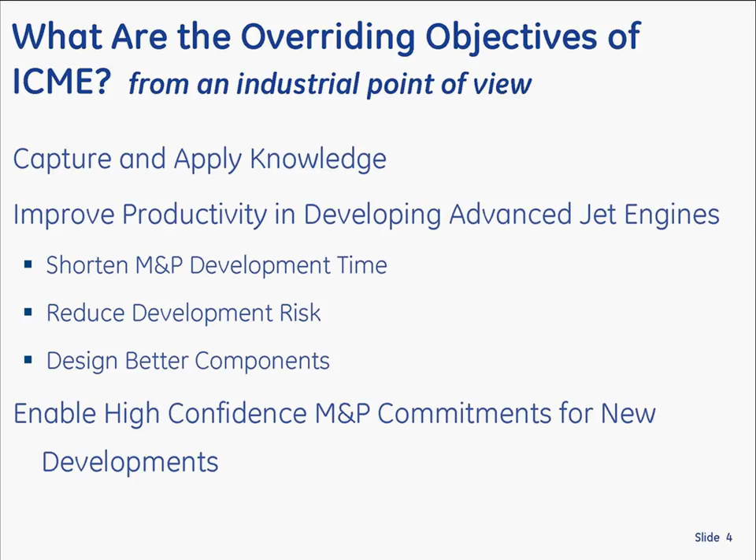Okay, so here's a slide I leveraged from Deb Whitus, sitting in the audience there, and we did this as part of the DARPA AIM program, when we were thinking about what is our end goal. Well, we want to be more like the people in the design world, where we can do analyses in hours to weeks, instead of weeks to months and actually to years, which is what it takes us in some cases.

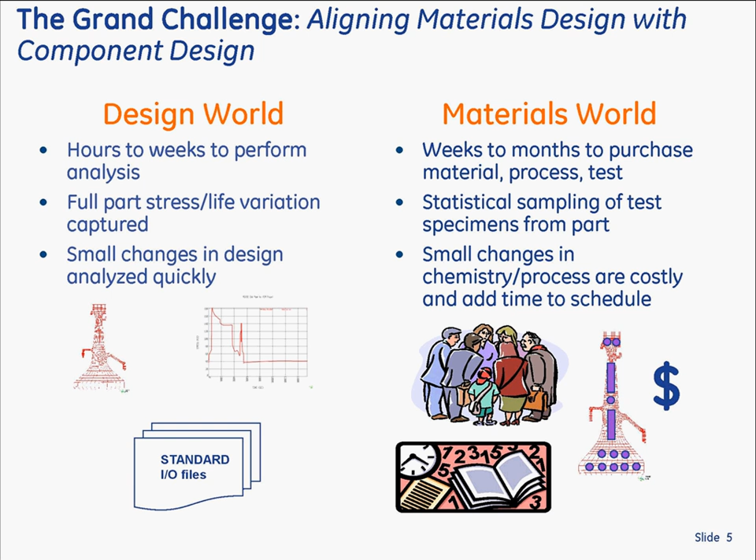So the fact is we didn't have the tools to do that effectively. Now we could take educated guesses, but at the end of the day, our chief engineers and the aviation authorities, they don't want our guesses. They want analysis as well as the data. So that was our challenge, to put some tools in place.

And here's another chart I leveraged from Deb, which is kind of a mapping of our business processes from a material standpoint. And up there in the upper left-hand corner is what you tend to focus on, I'm thinking of material models and stuff, which is developing new materials, either metallic or non-metallic. But if you look at the scale, that is a high level of effort, but it doesn't happen too often. Same with developing new processes.

But there are other things like doing analysis of design changes to existing parts or making some change to an existing process, which happens quite frequently. And if you integrate all these different activities, it turns out these other activities are more than 50% of our workload compared to doing the new thing. So the point is, whatever tools we develop, we want them to be useful, not only to develop new materials, but also to help us with these other problems.

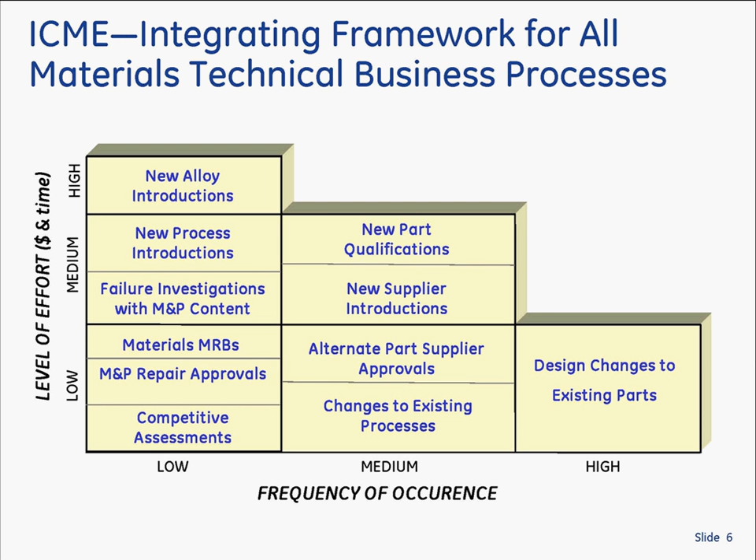Okay, so let me just summarize what our current activities are. Well, first of all, and I must say at the instigation of Steve Wax at the beginning of the DARPA AIM program, we integrated well with the design teams. And maybe 10 years ago that was a shotgun marriage. Now it really works really well, to the extent our people are even co-located with our design teams.

We also have many models for processing and physics-based models to predict properties. And it won't be that long until this is in the 3 digits in terms of the number of models, which is good news, but it's bad news too in the management sense of configuration management, if you will. But I'll show an example of how this actually helped us a lot in our scale-up time for developing our materials.

And one example, and some of our younger folks now don't appreciate it, it used to take us 3 iterations at least to get the shape of a complex forging die right. Well, now we do it in one shot, and no one thinks it shouldn't be that way. And they're right, it shouldn't be that way. But within a reasonably short time, that shows how far we've come.

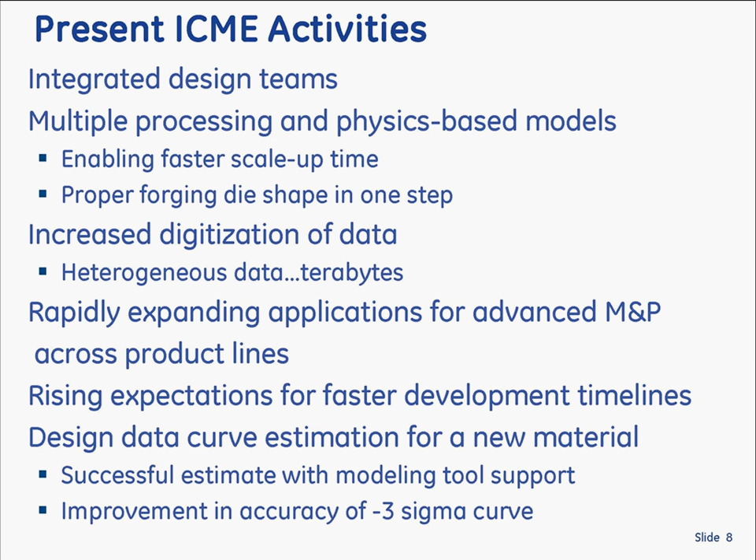Okay, just real quickly, this is a chart I put together a few years ago, and actually did a survey from aerospace and non-aerospace, briefed it a few times, and it's pretty much held to be reasonable. If you modify an existing material for a part that's not critical, that was a minimum of 2 to 3 years. If it was for a critical application, you could pretty much double that time.

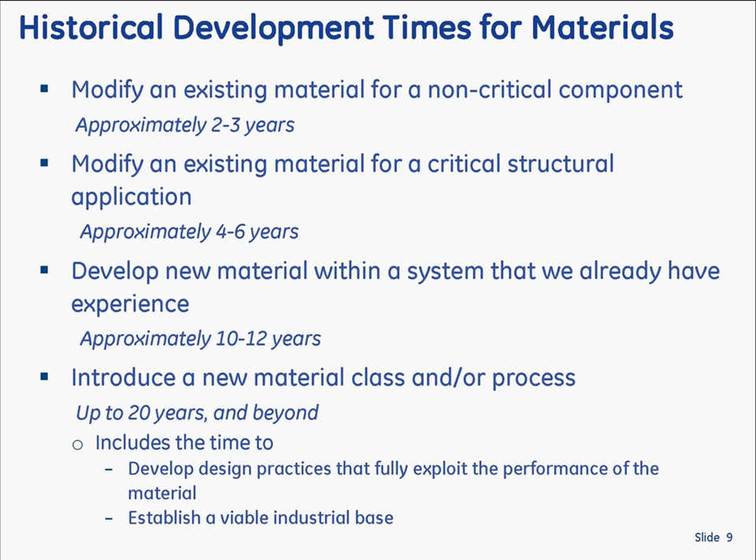If in fact it was a new material, or say a major chemistry change within a material system like nickel superalloys that we already have experience with, but it's a significant chemistry change, well, it doubles again. And then if it's a new class of materials like intermetallic or ceramic matrix composite, it doubles again. Of course, I was generous to say up to 20 years, but it's longer than that in many cases. So that's what the past history has been. Okay, so here are 2 programs that we've done within the last few years that managed to cut that time in half, or a little bit more than in half.

First is the work on developing a single crystal alloy for turbine blades with low rhenium or no rhenium. Now, it was based on Rene N5, which had 3% rhenium. And about 4 years ago, we determined that if we did nothing, just the GE use of rhenium would exceed the world's capacity of that very rare element. And so we were given the charge to do something about it.

So we did a lot of work in recovery and recycling. But beyond that, we were asked to look at changing the chemistry of these alloys, of N5, which already was pretty complicated. And it turned out that, kind of parallel to the work we were doing on disc in the DARPA AIM program, we had thought that someday they're going to ask us to do a new turbine blade. So on our own, we put in a bunch of tools to get ready for that day. And when the day came, they worked extremely well.

So we were able to do that program, instead of in 6 years, in 2 years. And I'll show you that 2 years means from the start of the program until full engine qualification by the FAA. So that includes engine test, engine flight test, in multiple engines. So it was something you would think would be impossible to do in the past.

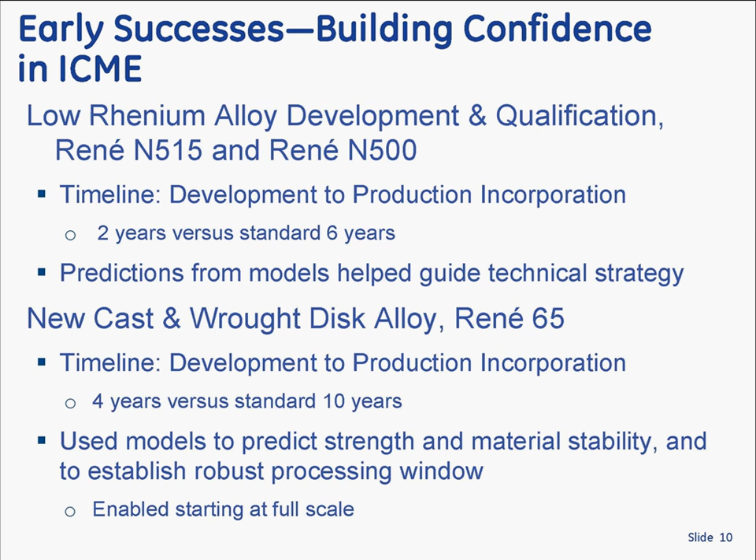Okay, for the low rhenium alloy, there have been papers by Doug Konitzer and Paul Fink and several other people from GE that talk more about the details. So all I have here is the high-level charts, but you can see we did 6 months of design of experiments, and we quickly saw that our estimates of what the results would be matched the data that we were getting. And so that got us kind of excited, and I was able to go to my leadership and convince our CEO that we were ready for a decision to scale up the chemistry for those two alloys after 6 months. And then the key thing was he allocated funding for the rest of the program.

So I didn't have to keep fighting the funding battle, which a lot of times slows you down on these development programs. And once we made the scale-up decision, we went immediately to full-scale heats. We were able to dial in the castability so we could use existing tooling, which saved a tremendous amount of time. And we made a lot of single crystal airfoils. And from the time we made the scale-up decision until we put it in the production engines for test was only 6 months. And then we got some flight testing as a result. So this date here is FAA qualification of the design change in the engine, and it was in multiple engines. It wasn't just one.

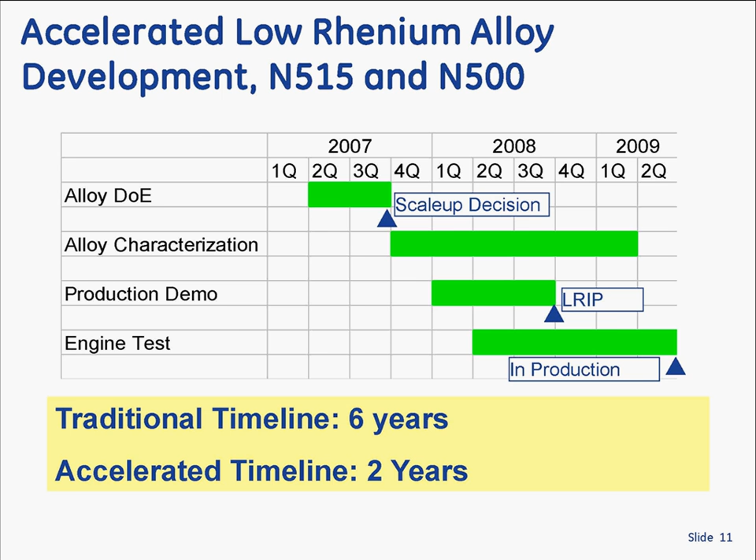On the cast and wrought disc alloy, this kind of shows the 10 or 12-year way we've typically done things. And you can see the first half of the time it's 2 or 3 rounds of design of experiments at subscale. Then we go full scale, and then we have a lot of things we do in parallel. And almost always when you go from subscale to full scale, you learn things that you didn't anticipate. And so there are some rework loops in here, which cause the time to drag out.

So we thought, if we really were confident in the tools that we had built and the way we did the analysis, let's eliminate all this subscale work and go immediately to full scale. And that's what we did. And so this shows taking this and collapsing that to a 4-year program. Now, actually, it's going to go to 4.5 years on some of our engines just because the engine tests have been delayed a little bit in some cases.

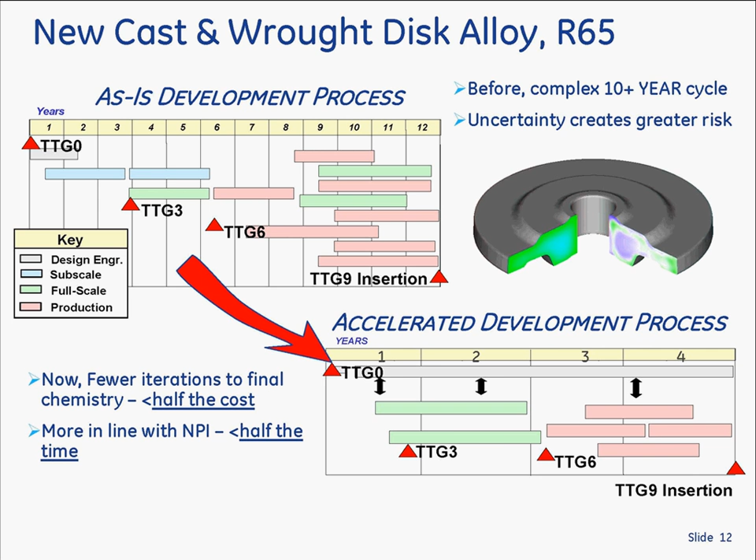And so here's what we were able to do. We made 600,000 pounds of this alloy. We used 10 forgers, made 250 forgings of all different sizes. And when you add up all the testing we've done just on our side of testing, that's 1 million hours of testing. Now, we've never introduced a new disc alloy after even 12 years, with 1 million hours on different test frames around the world.

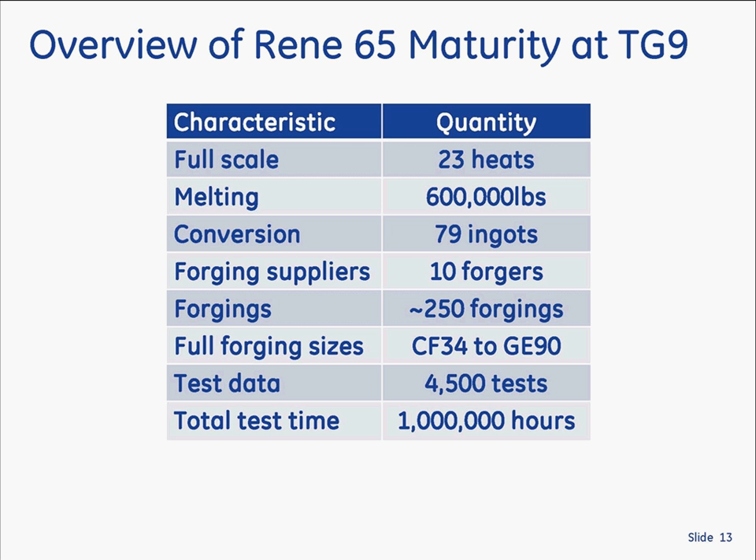It's fatigue testing, tensile testing, creep testing, or what have you. And it's also the first disc alloy that's gone into multiple engine applications at the same time. So it was a big bet that really has paid off, and thank goodness it did.

Okay, so what have we learned on developing models? Well, first of all, you had the problem as to which models do you want to develop, because there's a large number of those. And so we say, well, what activities are we doing that could benefit the most from modeling tools? And then we look to see what's available in terms of capability and what's their limitations as far as we can determine. And then which existing models could maybe be improved, or be extended to go help us. And then we use this to do some prioritization.

And then the options we consider, of course, are licensing, buying packaged software. Another option is development with others in a collaborative way. And one of the best examples is the Air Force program on metals affordability, which has helped us quite a bit. And that's where we work across the industry with our competitors and airframers and suppliers, in developing models.

And then we have a major effort that we do ourselves internally. But the end state that we look at is we want a set of tools that's part of our engineering tool set. So it becomes a standard way that we do things.

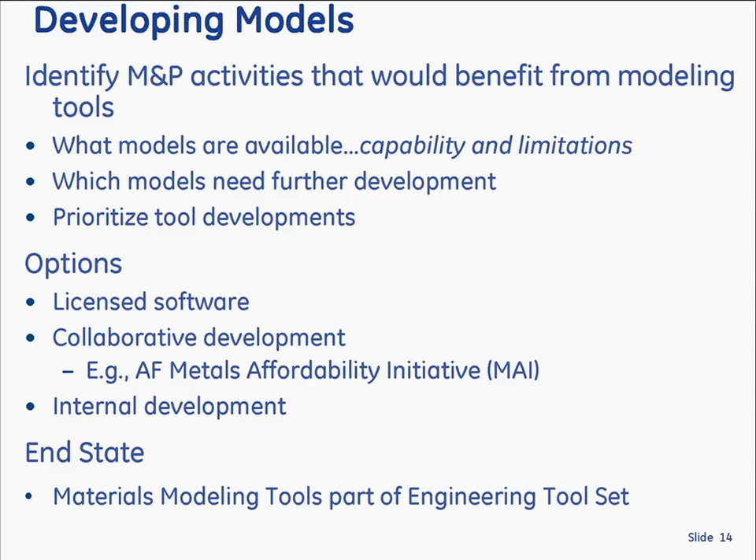Okay, so that kind of leads then to the future. Well, one big aspect of the future is, I could easily see we'll have hundreds of models, okay? But we want to be able to pick and choose the right models to link together, to run these simulations. And you want to be able to do that over different length scales, for example. So I think that's going to be a big deal.

I alluded to this already, that my leadership expects that accelerating this material development is the norm. It's the new norm. So they don't even look at it as an acceleration anymore. They look at it as, this is the way you're going to do it. And with taking 2/3 of the time out, like I showed on those examples, that much more matches the NPI cycle.

Now, I should have pointed out on those 2 examples of the low rhenium single crystal blade alloy, as well as the new cast and wrought disc alloy, which went into our existing engines as well as our new engines, we had the constraint of the existing engines and not changing the design of the part itself. And so that means the properties or whatever had to be better than or equal to what they currently were using then, for their application. So that's kind of a big deal.

If you're designing a material just for a new engine, you have a lot more interaction with the design engineers on trade-offs that could be made. And that's another aspect of improvement that we make with our designers.

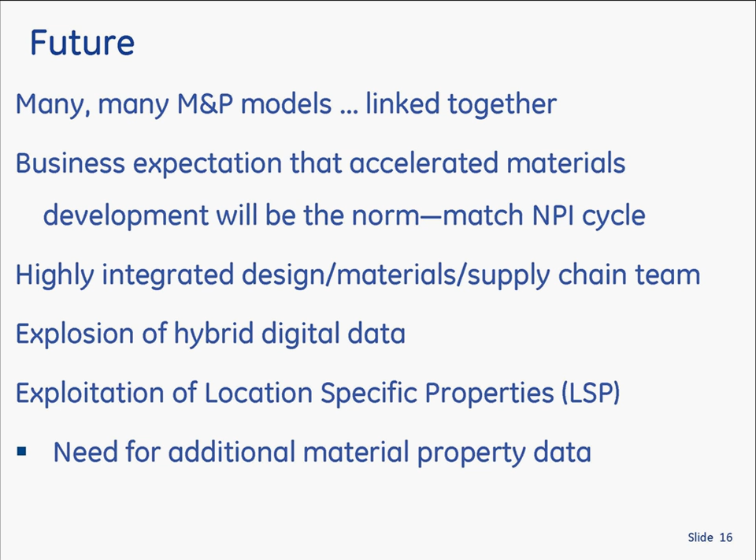And another point for the future is our designers are intrigued with the idea of what we call location-specific properties, and that means instead of assuming, like on the turbine disk, that every part of the disk has the same properties, you could take advantage of the fact that it doesn't indeed have equal properties in all parts of the disk, and design it for those localized properties. Well, that means you need a lot more material property data than what we have now.

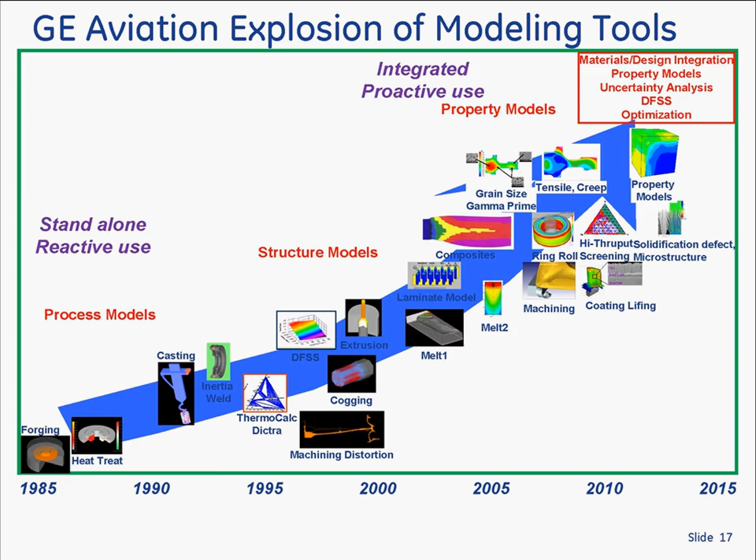Okay. So this leads to the idea of, here's kind of a little plot that I did on the explosion of modeling tools that we have. See, you start with process models early on, structure models, and now heavily into property models. And that's an exponential curve, is what I believe. And so I leveraged this from the NRC report on ICME, which I liked. I only tweaked a few of the boxes.

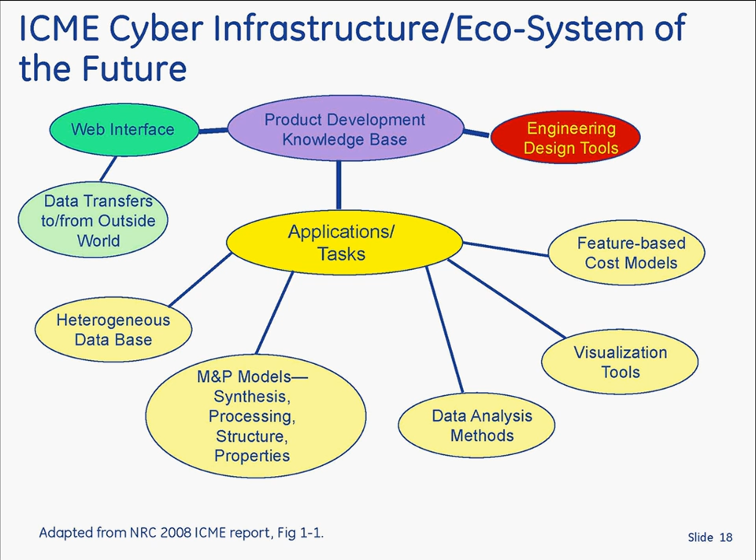As you start with this knowledge base, you have these external interfaces, and then internal to the knowledge base, you have the heterogeneous database, you have the modeling tools, analysis method, ways to visualize the results of the simulation, and then, of course, cost model. And then we put that into the structure of like a software system. How would you implement that on something we call ICME net?

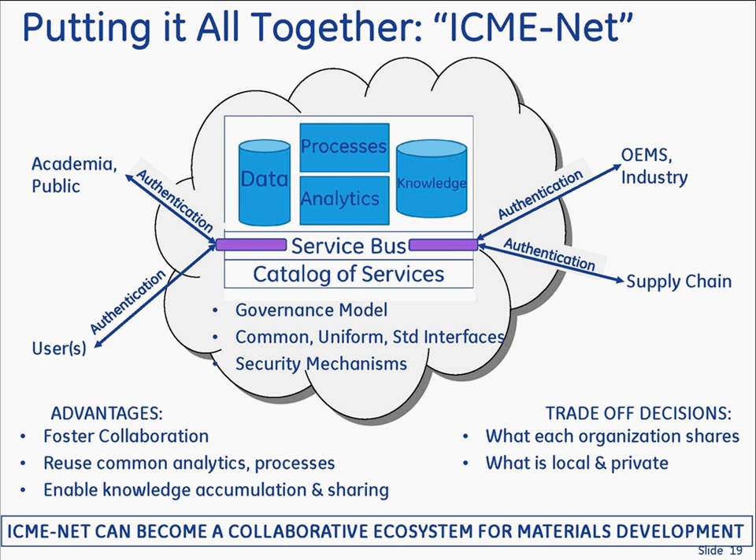And the key is you see these external links, which are determined by this governance model, which depending on who the users are, they have different types of permissions to see certain parts of the database or certain tools or whatever. So it's things that are agreed to up front, and then they would have full access to that.

Now, what I showed, oops, I went too far. Let's see if I can back up. Well, in the interest of time, I won't back up.

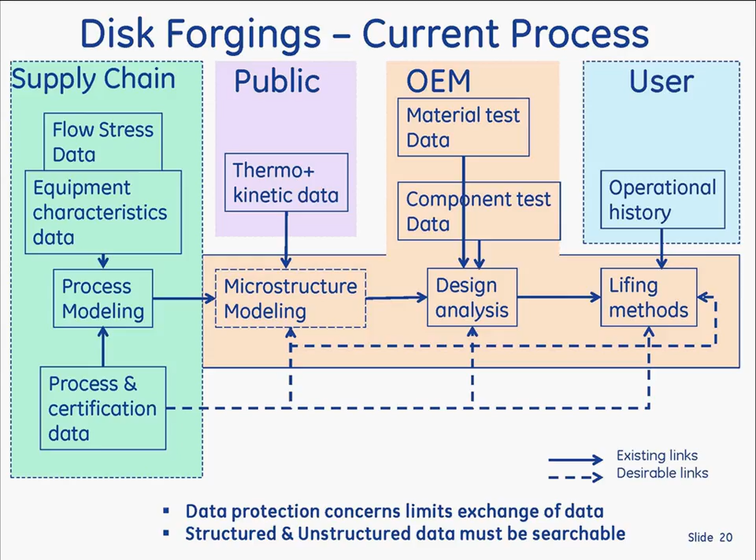What the previous slide showed is for an advanced disk program, which I haven't talked about, but we're doing a brand new powder disk program besides the cast and wrought. There's a lot of interaction that's occurring, including with academia, but it's all done by hand, for the most part. This maps that into the framework of the ICME net to say, how could that data, in the flow of information, be better handled with some kind of a structured software-based system. And in fact, we could do more with this kind of a system because there's a lot of information in the database that could be exploited more than what we're doing now.

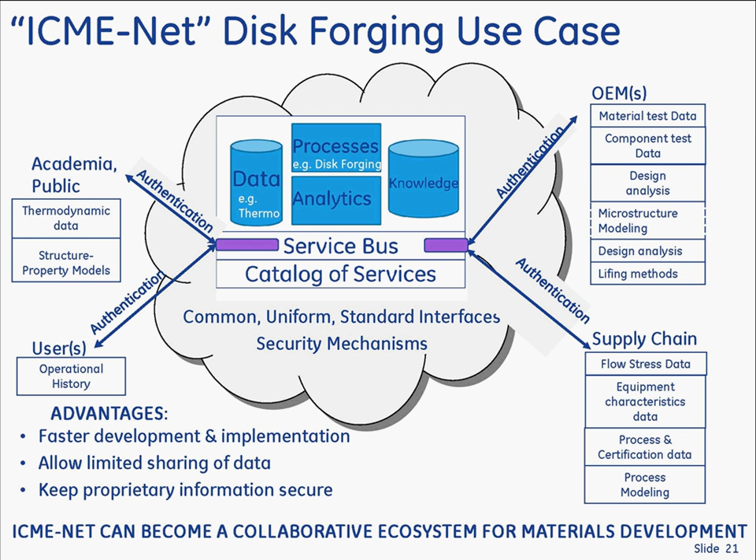Okay, so what are some of the challenges? Well, one is not only doing the development, but we have to validate these models, and really, really important is do the maintenance of these models, both the physics-based and the heuristic-based tools, as we continue to get more data, more information. Also, I talked about this challenge of multi-scale modeling, multi-phenomena, how we really have to link these models together, maybe sometimes in an iterative fashion. And importantly, establishing some sort of collaborative infrastructure that we could use to do these things.

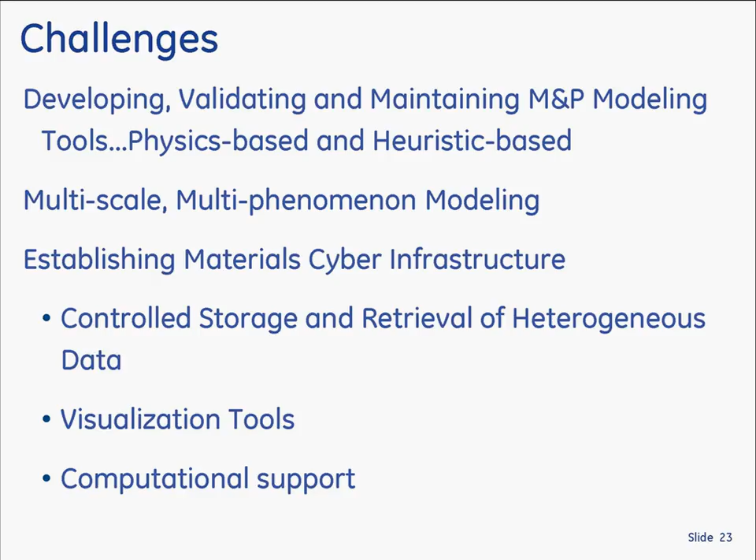Okay, then lastly, kind of the takeaway point is turning back or doing something different than ICME, I view it's no longer an option because we did show what is possible to do with an accelerated program. And therefore, success builds on itself, and because of some success, we've been able to get more internal funding to do development activities, and I'm glad there's external programs available to do that as well. Now, the vision and objectives for what you want to do for ICME differs depending on where you fall in the spectrum here. And so whatever is done with the collaborative infrastructure needs to satisfy multiple needs.

And lastly, this infrastructure, at the end of the day, it's going to be the glue that kind of holds everything together. And what I see now is with a lot of intense effort on the part of very expert people, we were able to craft things together in a way that worked well. But could I do it on a regular basis with folks with less experience? Clearly the answer is no. And I say that not only from the standpoint of my department, but the folks we work with in the supply chain and in academia. So we really do need to build this infrastructure in some way. So I think that's one of our big challenges as we look to the future.